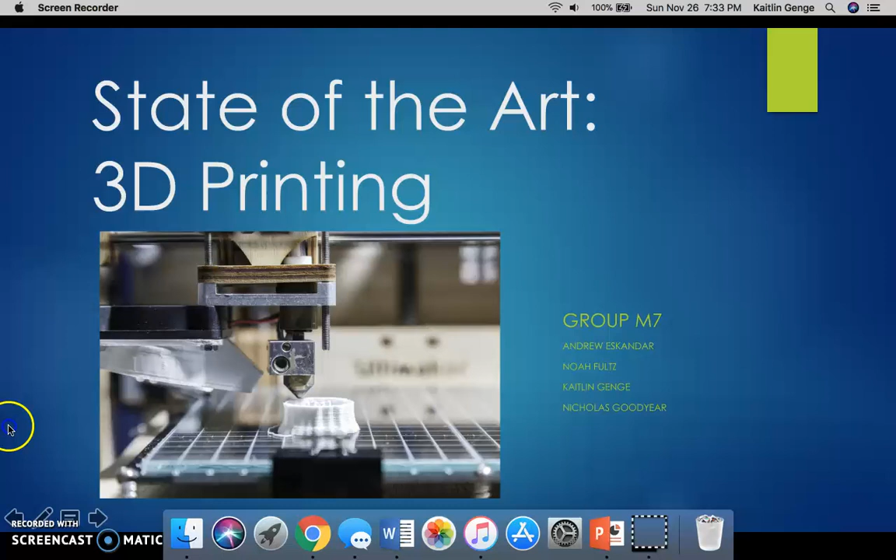Additive manufacturing technologies have reshaped the world of production. 3D printing processes have saved organizations millions of dollars, and the applications and potential of these devices continue to grow. It's common to find these technologies in research and development labs in fields such as aerospace, biomedical, robotics, and more.

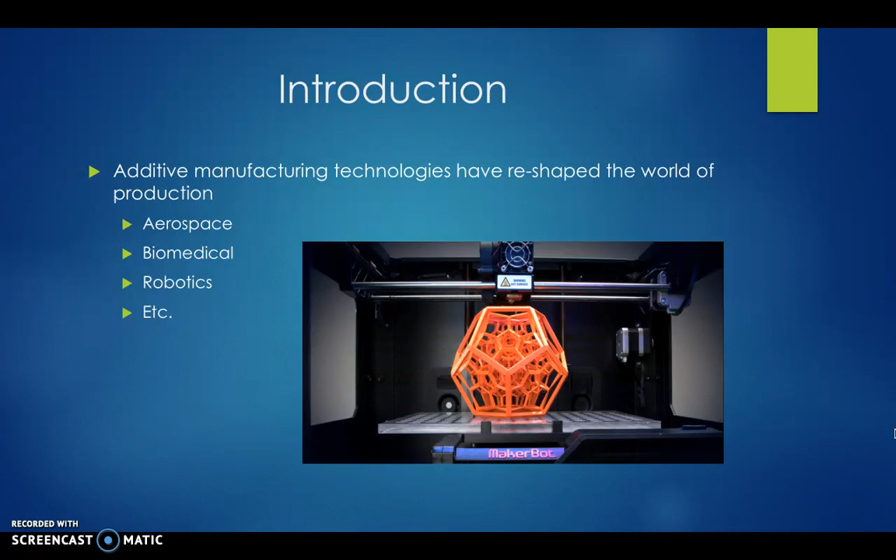Since ideas of 3D printing first emerged in 1977, significant progress has been made in developing and advancing the field. Only 3 years after the first functional 3D printer was created in 1986, TV shows such as Good Morning America began introducing these devices to the public. The product quickly caught on.

In 1993, 3D printers were being used to produce shell molds for casting operations. 6 years later, AeroMat introduced the first 3D printer which could print metal. In the 2000s, 3D printed organs were introduced and small at-home printers emerged.

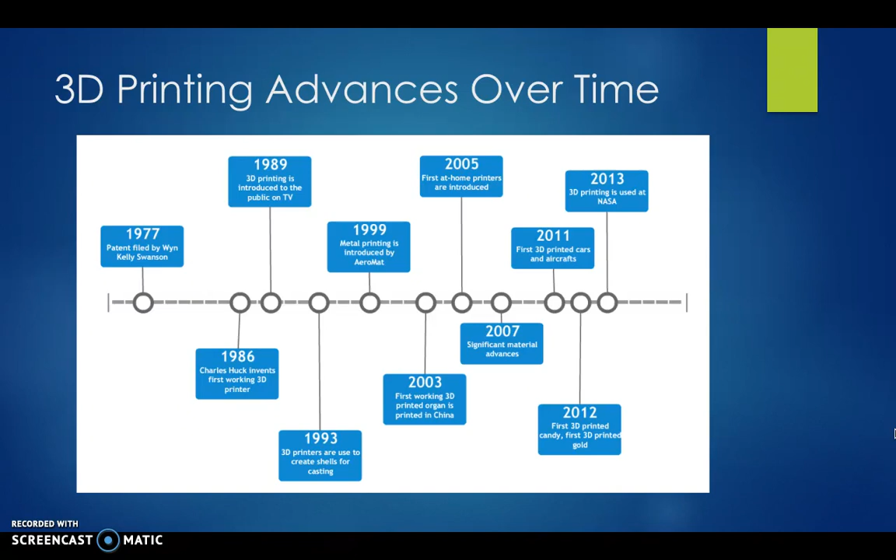By 2007, material research in the field had advanced to a point where materials could be used in 3D printing to mock certain desirable material properties, such as hardness and ductility. Beyond 2010, new applications of 3D printing began to arise, such as printing of cars, aircrafts, and candy. In 2013, NASA embraced the technology for the first time. This all led to the current state of the art of 3D printing.

Today, there are quite a few materials which can be used for 3D printing, such as nylon, stainless steel, and ceramic. The price is significantly lower now than it was when the technology was first introduced, and for this reason, 3D printing is more accessible and is becoming more common. Extremely complex parts are now being created and used for applications in large-scale production, consumer goods, and the biomedical industry.

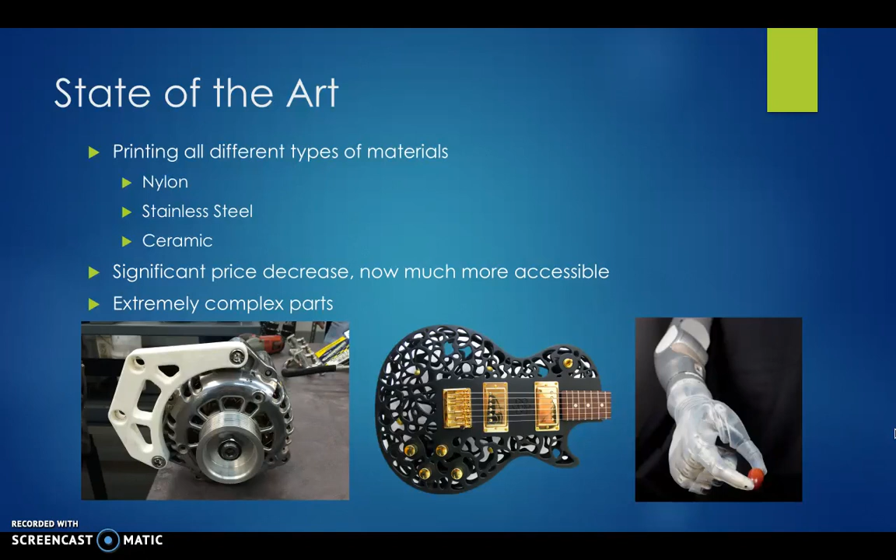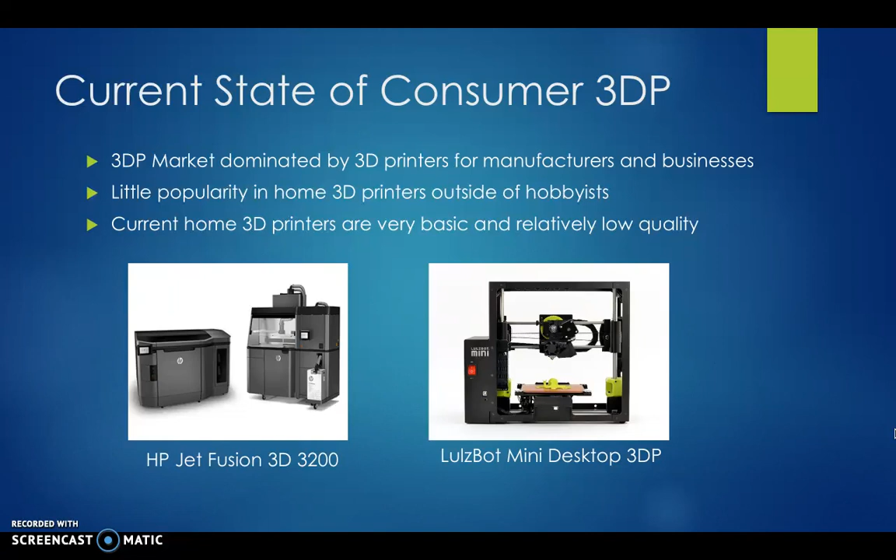The current state: currently, the 3D printing market is dominated by 3D printers for manufacturers and businesses, such as the HP Jet Fusion 3D 3200 in the bottom left. There's not too much popularity at the moment in 3D printers for the home outside of just hobbyists. Current home 3D printers are very basic and relatively low quality, like the Lulzbot Mini desktop 3D printer. Just by the name, you can tell it's not going to be a very technologically advanced 3D printer.

In the future, we're going to see more uses of 3D printing in education, as technologies like the 3Doodler in the bottom left are paving the way for use of full-fledged 3D printers in education. And also on the bottom right, the Robo 3D printer kit for a quadcopter—essentially you print off each of the individual parts and then put it together. That could also be something more home friendly, and we're going to start to see more of things like that being advertised in the future.

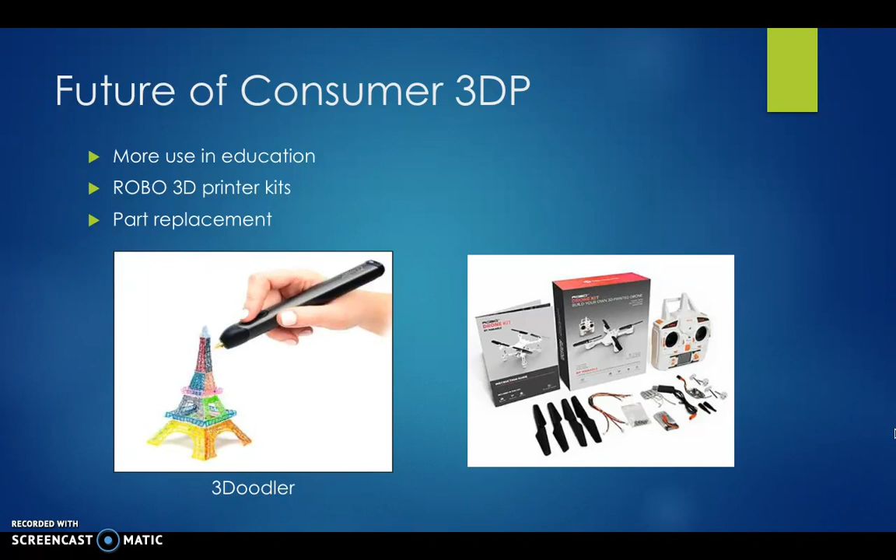Another area is part replacement, because eventually common parts like screws that might go missing could have specifications you could use to 3D print your own screw—let's say you lost a screw on your laptop. Also, advances in technology will allow for more advanced, cheaper home 3D printers. That's inevitable—as the technology increases, the prices for these home 3D printers are going to go down, and they're going to have a lot more capabilities, as well as further innovations in streamlining 3D printing to allow use for the everyday person.

Obviously, the everyday person wouldn't be expected to have extensive knowledge in CAD software, so they might have a simpler interface, and maybe you could make something similar to that picture below with a 3D printed phone case.

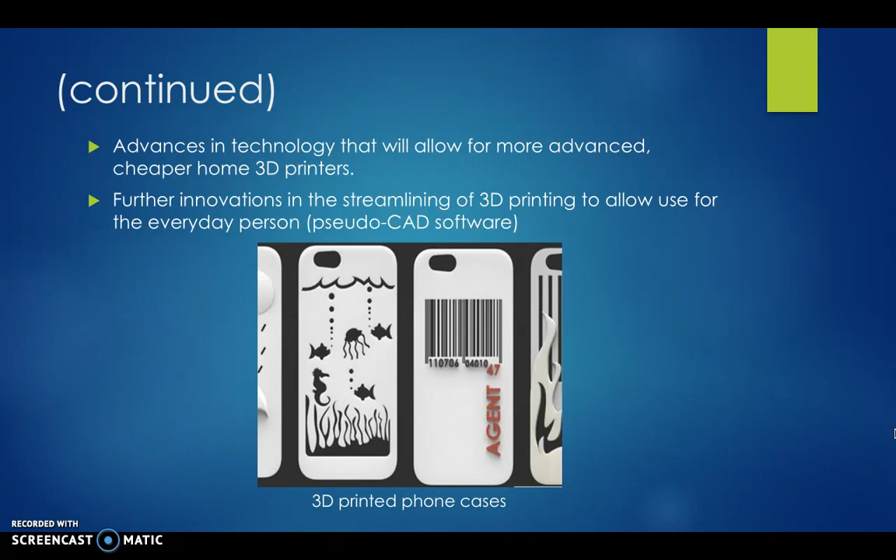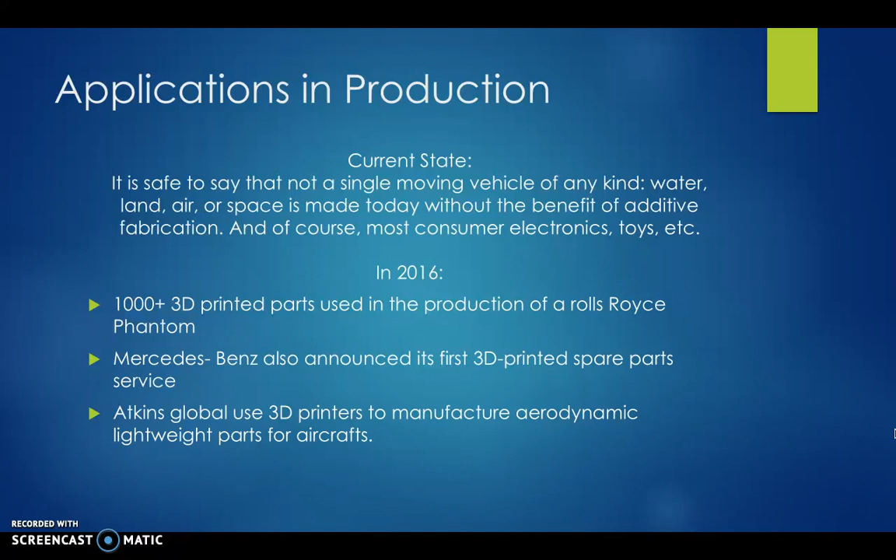Some of the advantages of 3D printing over traditional manufacturing is the lower number of production steps. You don't have to go through many steps like prototyping, manufacturing, assembling, or shipping. All you have to do is make your design and 3D print it, and you have your end product.

Of course, this will lower production cost by reducing shipping and storage costs, potential limitation of import costs through localized production.

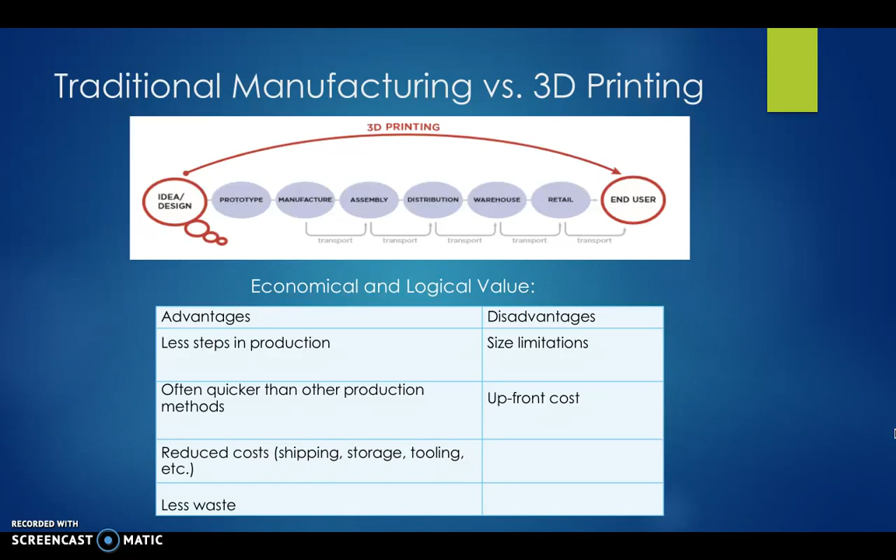One more advantage is the efficient use of materials. Expensive materials like titanium scraps that would otherwise be waste and unusable with traditional manufacturing methods can be reused in 3D printing and could save companies millions of dollars.

As we can see, 3D printing will continue to expand in many areas. In the future, 3D printing is moving in several directions at this time and will continue to expand. Up next are three concepts of how 3D printing could be implemented in production.

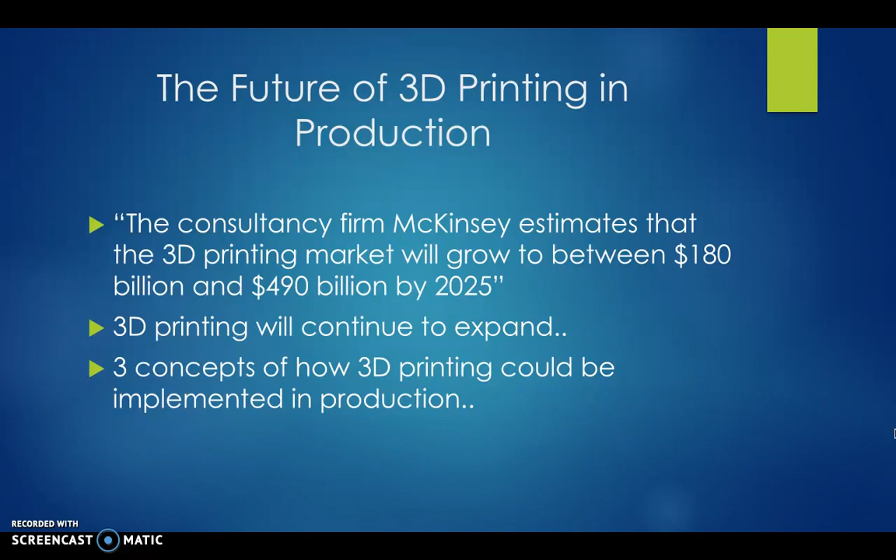On-demand manufacturing, which means goods are produced when or as they are required, based on real-time and current data from clients. For example, a car repair shop wants a specific part for a specific car, for a specific model, to fix a car. All they have to do is inform the spare parts services, and they will get it printed and delivered to them.

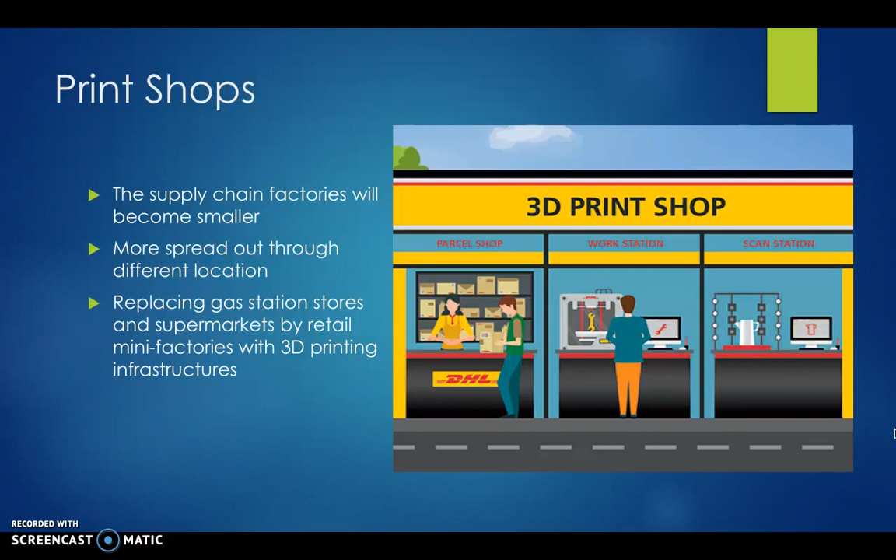3D printing shops. This concept is easily self-explanatory. The supply chain factories will become smaller and more spread out through different locations, replacing gas stations, stores, and supermarkets by retail mini factories with 3D printing infrastructures.

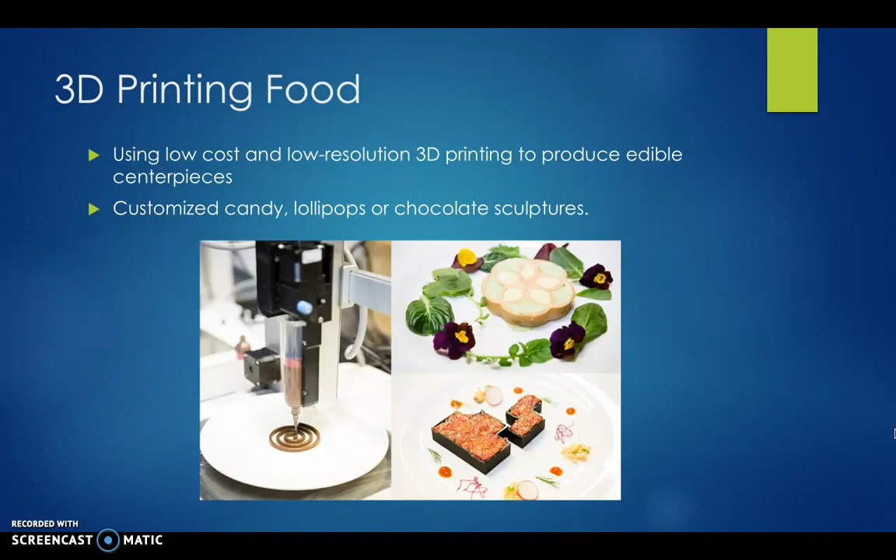3D printing food. Imagine it's Friday night and you want a pizza, but instead of calling your local pizza place for delivery, you just print out your dinner. Or use 3D printing to customize nutrients in all of your meals and have control over all of your ingredients.

3D printing was first used in the medical industry in the early 2000s. At this time, it was most dominantly used for the production of dental implants and prosthetic limbs. The digital imaging data produced by MRI, CT, or X-ray processes can be readily converted to an STL file for printing.

As a result, very complex geometric shapes with high accuracy can be produced. In addition to the desirable physical traits of 3D printing, time and cost are reduced since a device can be designed and printed in as little as a few hours.

A major use of 3D printing today is in the manufacturing of invisible dental aligners. These highly customized devices can be made very quickly and economically using 3D printing. Invisible aligners provide superior aesthetic characteristics and very predictable tooth movement, which make them so popular.

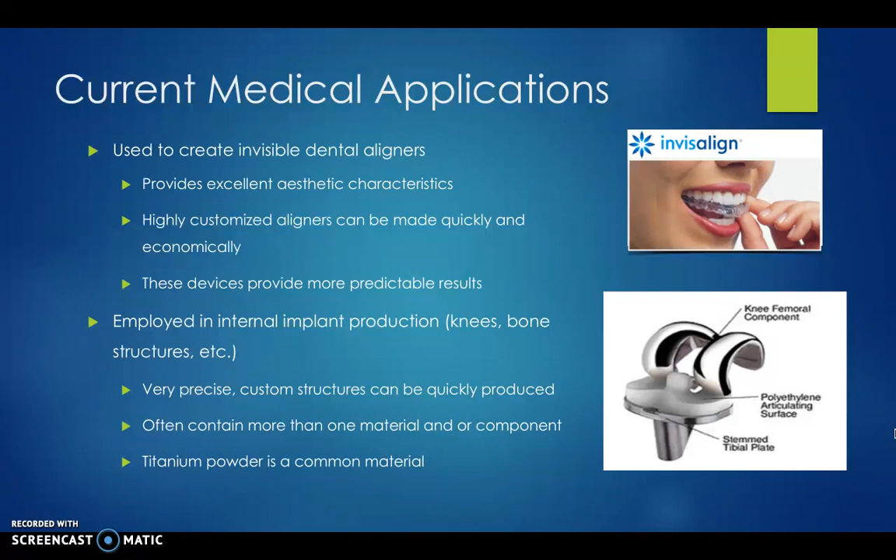These printing technologies are often used in internal implant production because of their quick production rates and high accuracy. Titanium powder is a common material used, but other materials such as polymers are also used for some components.

In the future, advancements in 3D printing will likely allow new procedures in the medical industry. Samples of skin tissue have been produced and would be valuable when treating burn victims. When this process becomes viable, it will likely be performed directly on the patient's body.

Functional kidney, liver, and cardiac tissues have also been produced. There are obstacles to overcome before whole organs can be printed, such as the presence of multiple types of tissue, like vascular, neural, and muscle tissue.

When this technology becomes a reality, patients will receive organs promptly and at a lower risk of organ resistance. These processes can also be used to produce organs for pharmaceutical research rather than relying on animal testing.

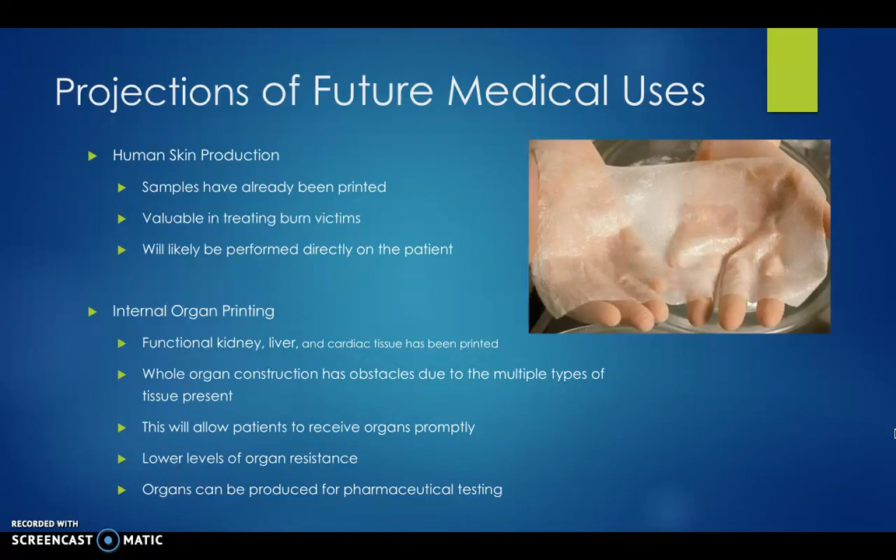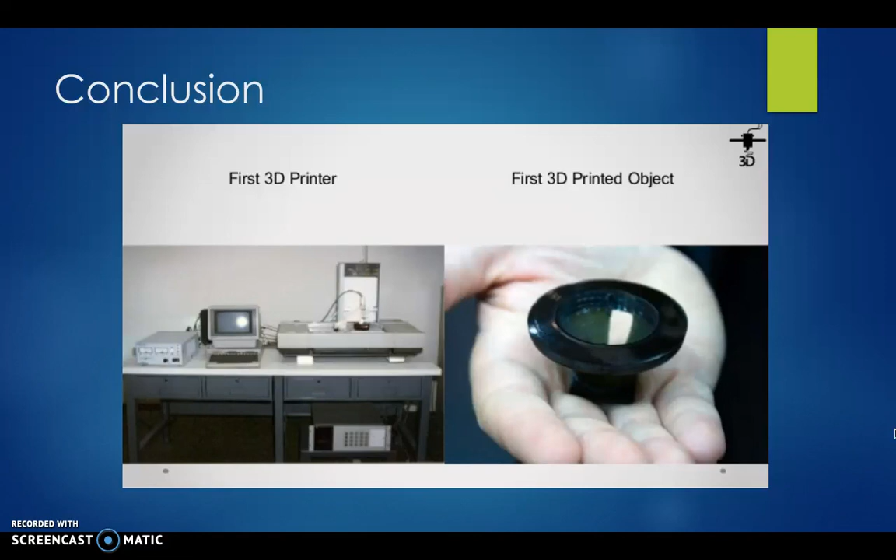The field is still in its early days, and there is a lot of promise for the future of additive manufacturing.